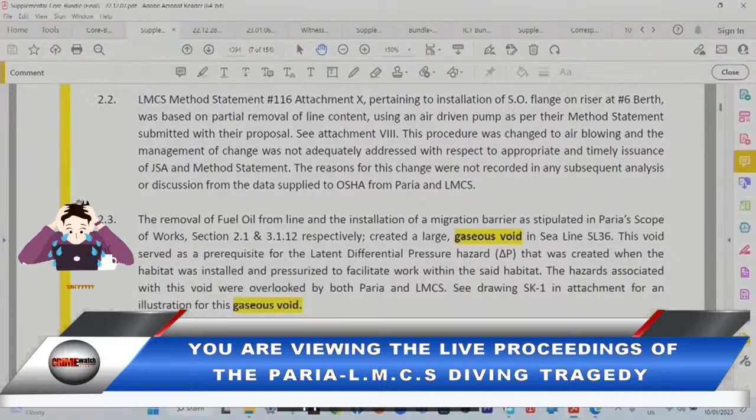The removal of fuel oil from line and the installation of a migration barrier, as stipulated in PARIA's Scope of Works, Section 2.1 and 3.1.12, respectively, created a large gaseous void in sea line SL36. This void served as a prerequisite for the latent differential pressure hazard that was created when the habitat was installed and pressurized to facilitate work within the said habitat. The hazards associated with this void were overlooked by both PARIA and LMCS. See drawing SK1 in attachment for an illustration for this gaseous void.

LMCS Job Safety Analysis, PARIA's Permit to Work number 9320, LMCS's Method Statement, Risk Assessment, LMCS's Toolbox Meeting, LMCS's Dive Plan, and PARIA's Bid Evaluation of LMCS's proposal all failed to identify this potential differential pressure delta P hazard, and hence no steps to eliminate the hazard were implemented. This latent hazard existed at the onset of work within the habitat and became active when the divers were attempting to remove the primary seal, which is the inflatable plug, from within the riser. See drawing SK1 in attachment and section 3.1 for further details.

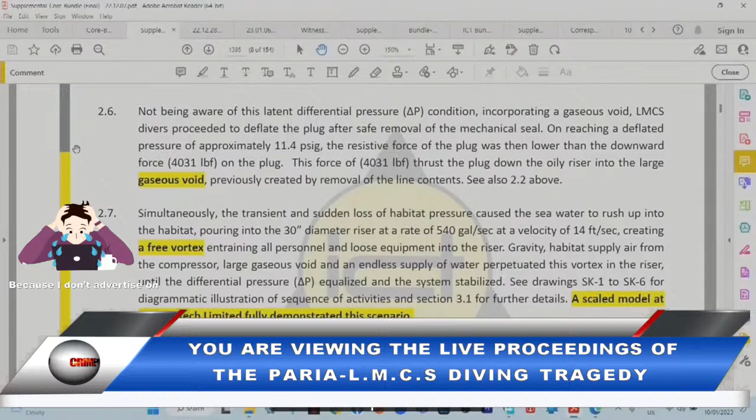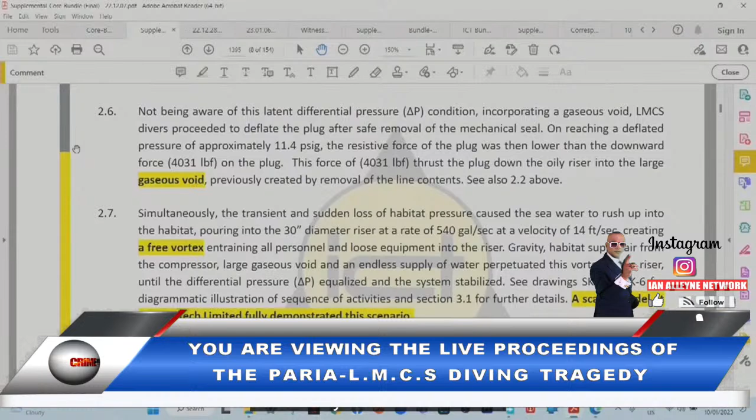Not being aware of this latent differential pressure condition incorporating a gaseous void, LMCS's divers proceeded to deflate the plug after safe removal of the mechanical seal. On reaching a deflated pressure of approximately 11.4 psig, the resistive force of the plug was then lower than the downward force, 4,031 pounds force on the plug. This force of 4,031 thrust the plug down the oily riser into the large gaseous void, previously created by removal of the line contents. See also 2.2 above.

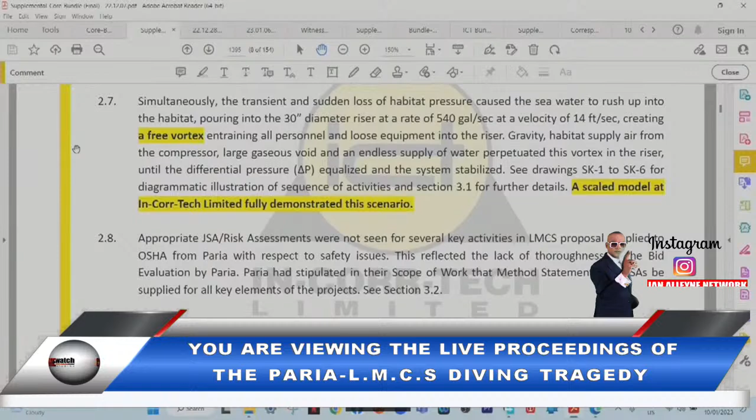Simultaneously, the transient and sudden loss of habitat pressure caused the seawater to rush up into the habitat, pouring into the 30-inch diameter riser at a rate of 540 gallons per second at a velocity of 14 feet per second, creating a free vortex, entraining all personnel and loose equipment into the riser. Gravity, habitat supply air from the compressor, large gaseous void, and an endless supply of water perpetuated this vortex in the riser. A diagrammatic illustration of sequence of events and section 3.1 for further details. A scale model at In-Corr-Tech Limited fully demonstrated this scenario.

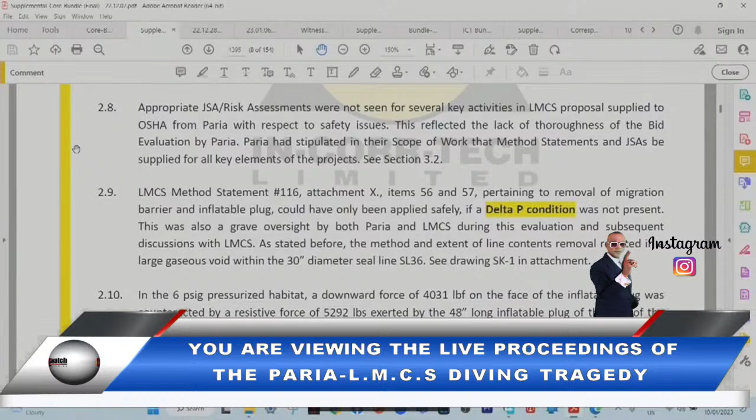Appropriate JSA risk assessments were not seen for several key activities in LMCS's proposal supplied to OSHA from PARIA with respect to safety issues. This reflected the lack of thoroughness of the bid evaluation by PARIA. PARIA had stipulated in their scope of work that method statements and JSAs be supplied for all key elements of the projects. See section 3.2.

LMCS's method statement 116, attachment X, items 56 and 57, pertaining to removal of migration barrier and inflatable plug, could only have been applied safely if a delta P condition was not present. This was also a grave oversight by both PARIA and LMCS during this evaluation, and subsequent discussions with LMCS. As stated before, the method and extent of line content removal resulted in a large gaseous void within the 30-inch diameter sea line SL36.

See drawing SK1 in attachment. In the 6 psig pressurized habitat, a downward force of 4,031 pounds force on the face of the inflatable plug was counteracted by a resistive force of 5,292 pounds exerted by the 48-inch long inflatable plug on the wall of the riser, based on a plug inflation pressure of 15 psig. This provided the necessary seal during all hot works within the habitat.

The sequence of events leading up to this accident are described verbally and illustrated via appropriate drawings, as shown in sketches SK1 to SK6 in the attachments. The operational safety concerns observed during inspection of the crane, for example load slippage under engine cut-off, non-functional load cell, etc., did not contribute to this accident.

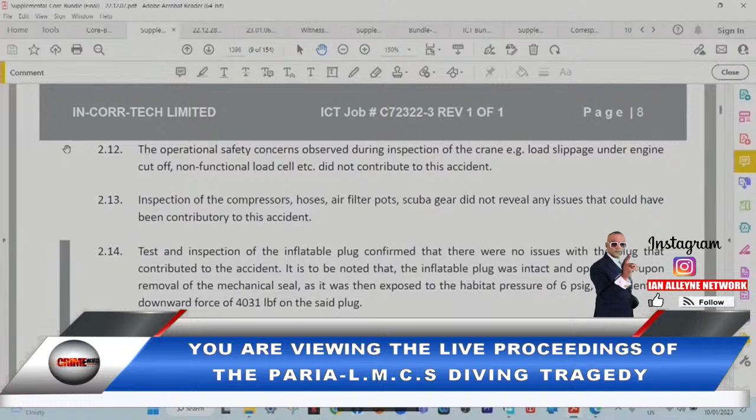Inspection of the compressors, hoses, air filter pots, scuba gear did not reveal any issues that could have been contributory to this accident. Test and inspection of the inflatable plug confirmed that there were no issues with the plug that contributed to the accident. It is to be noted that the inflatable plug was intact and operational upon removal of the mechanical seal, as it was then exposed to the habitat pressure of 6 psig, equivalent to a downward force of 4,031 pounds on the said plug.

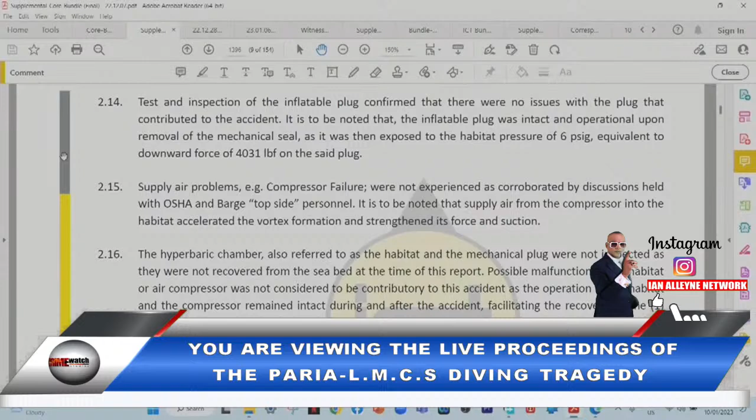Supply air problems, for example compressor failure, were not experienced as corroborated by discussions held with OSHA and barge topside personnel. It is to be noted that supply air from the compressor into the habitat accelerated the vortex formation and strengthened its force and suction. The hyperbaric chamber, also referred to as the habitat, and the mechanical plug were not inspected as they were not recovered from the seabed at the time of this report.

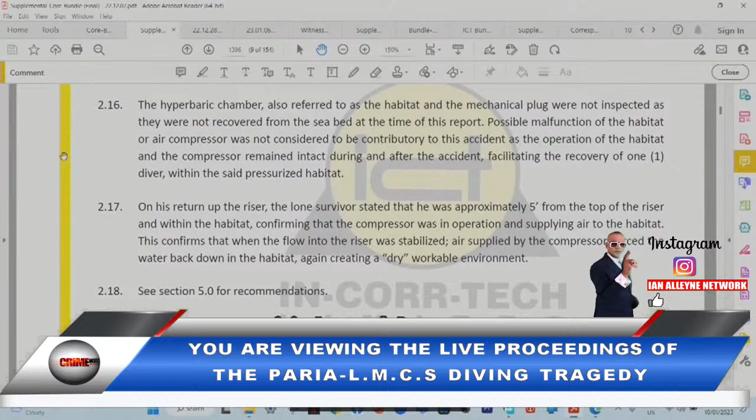Possible malfunction of the habitat or air compressor was not considered to be contributory to this accident, as the operation of the habitat and the compressor remained intact during and after the accident, facilitating the recovery of one diver within the said pressurized habitat.

On his return up the riser, the lone survivor stated that he was approximately 5 feet from the top of the riser and within the habitat, confirming that the compressor was in operation and supplying air to the habitat. This confirms that when the flow into the riser was stabilized, air supplied by the compressor forced the water back down in the habitat again, creating a dry, workable environment.

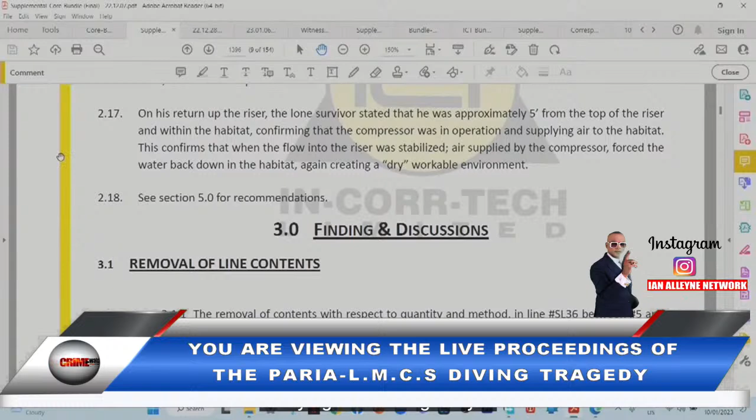I will now read out the findings and discussions. This is at 1396. Firstly, removal of line contents. The removal of contents with respect to quantity and method in line SL36 between number 5 and 6 berths was the underlying factor that led to this accident. This removal created a gaseous void in the riser and sea line, setting up a latent differential pressure condition between the habitat and a large gaseous void in the sea line when the mechanical seal and inflatable plug were installed and the habitat pressurized. See drawing SK1 in attachment.

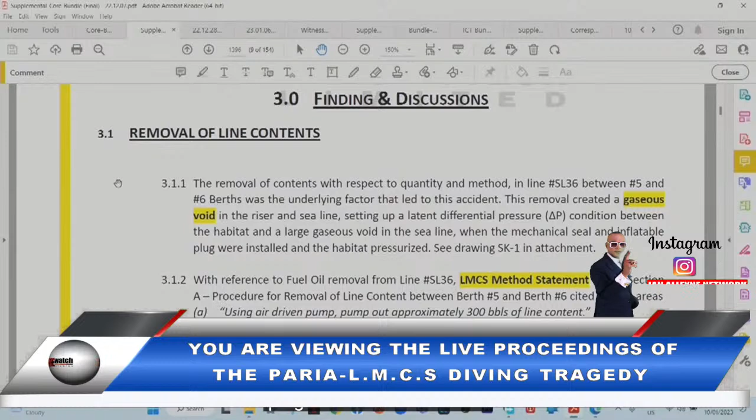With reference to fuel oil removal from sea line 36, LMCS's method statement under section A, procedure for removal of line content between berths 5 and berth 6, cited 2 areas. A, using air-driven pump, pump out approximately 300 barrels of line content. B, once level in the riser dropped to 35 feet below sea level, a line plug will be installed. Reference page 6 of 22 of LMCS's method statement.

A and B are contradictory, as removal of line contents to 35 feet below sea level in the riser would have been equivalent to approximately 30 barrels of oil removal with no gaseous void formation on installation of the mechanical seal and inflatable plug. On the other hand, as stated by LMCS, A, pumping out 300 barrels with an air pump does not equate to dropping level in the riser to 35 feet below sea level. This discrepancy was not addressed in PARIA's bid evaluation.

Further, LMCS's project schedule calls for draining of line from day one of job execution, further adding conjecture to this exercise. PARIA's maintenance department, as recorded by OSHA, stated that line contents were indeed removed by air blowing from number 5 berth to number 6 berth.

This latent hazardous condition existed very early in the job execution, but was activated on the 25th of February 2022 when 5 divers were in the process of deflating the riser plug for its removal. See drawing SK3 in attachment for a pictorial illustration. See drawing SK1 and SK4 in attachment. And he concludes, changing the method of oil removal from the line from using an air-driven pump, as per LMCS's method statement, to forced air blowing from berth 5 resulted in a dramatic increase in the risk profile of the job.

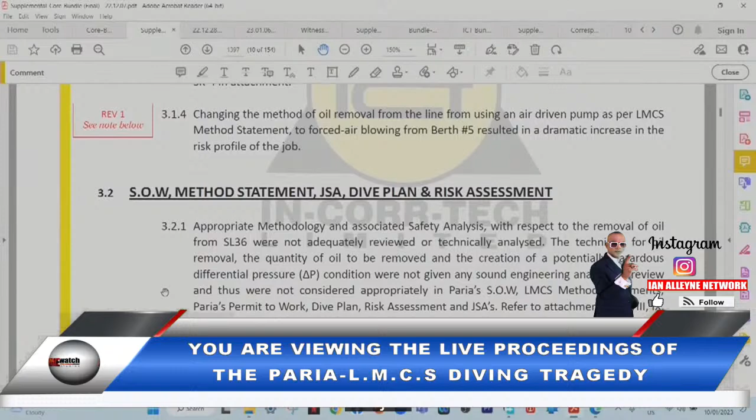I turn to the recommendations as made at page 1403 at 5.0. At 5.1, working in differential pressure environments necessitates an engineering risk analysis by a competent person. Differential pressure can be assumed to exist when: 1. Water levels vary between adjoining areas. 2. Water is next to a gaseous void. 3. HP air is next to low pressure air. 4. Positive pressure, that is, above atmospheric, is next to atmospheric pressure, 0 psig.

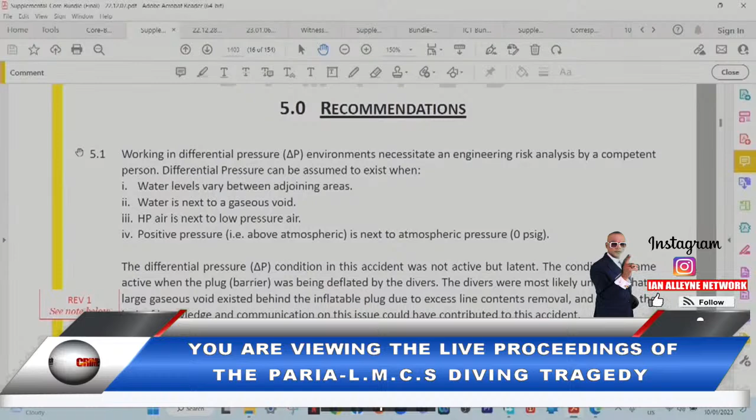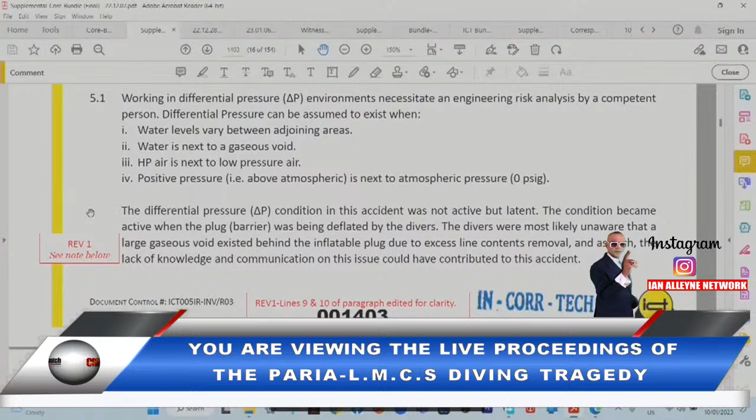The differential pressure condition in this accident was not active but latent. The condition became active when the plug or the barrier was being deflated by the divers. The divers were most likely unaware that a large gaseous void existed behind the inflatable plug due to excess line contents removal, and as such, the lack of knowledge and communication on this issue could have contributed to this accident.

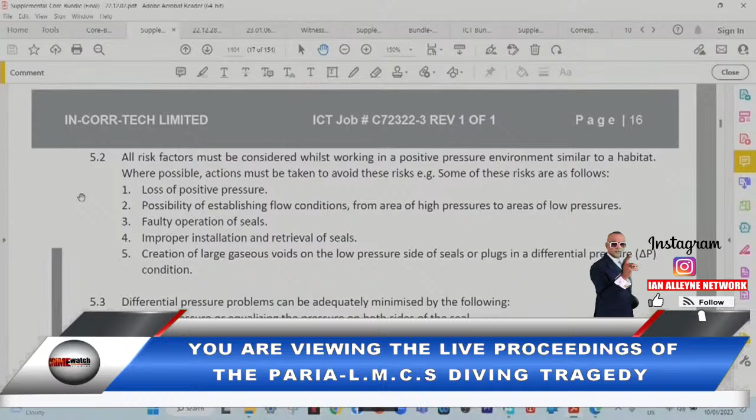5.2. All risk factors must be considered whilst working in a positive pressure environment similar to a habitat. Where possible, actions must be taken to avoid these risks. Example, some of these risks are as follows. 1. Loss of positive pressure. 2. Possibility of establishing flow conditions from areas of high pressure to areas of low pressure. 3. Faulty operation of seals. 4. Improper installation and retrieval of seals. 5. Creation of large gaseous voids on the low pressure side of seals or plugs in a differential pressure condition.

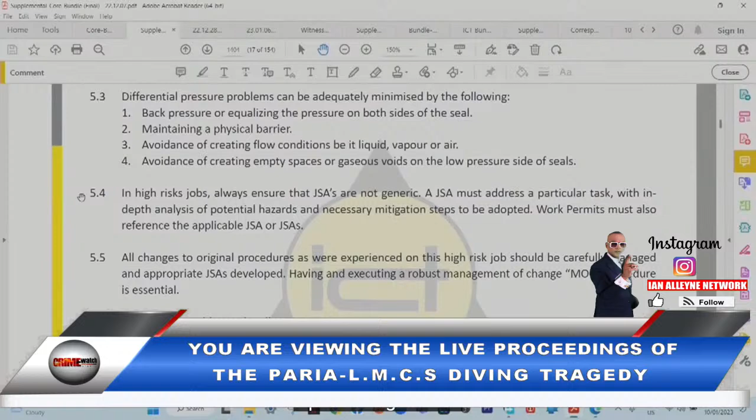5.3. Differential pressure problems can be adequately minimized by the following. 1. Back pressure or equalizing the pressure on both sides of the seal. 2. Maintaining a physical barrier. 3. Avoidance of creating flow conditions, be it liquid, vapor, or air. 4. Avoidance of creating empty spaces or gaseous voids on the low pressure side of seals.

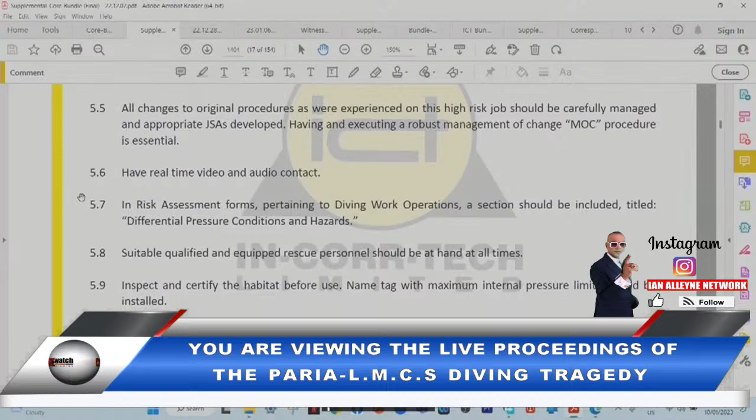5.4. In high-risk jobs, always ensure that JSAs are not generic. A JSA must address a particular task with in-depth analysis of potential hazards and necessary mitigation steps to be adopted. Work permits must also reference the applicable JSA or JSAs. 5.5. All changes to original procedures, as were experienced on this high-risk job, should be carefully managed and appropriate JSAs developed. Having executed a robust management of change, MOC procedure is essential. 5.6. Have real-time video and audio contact.

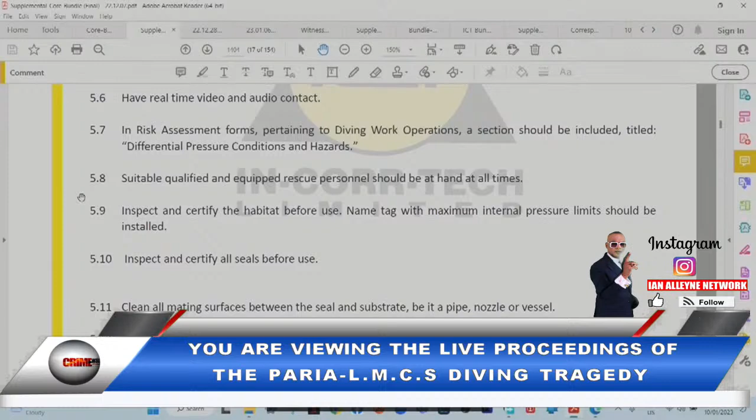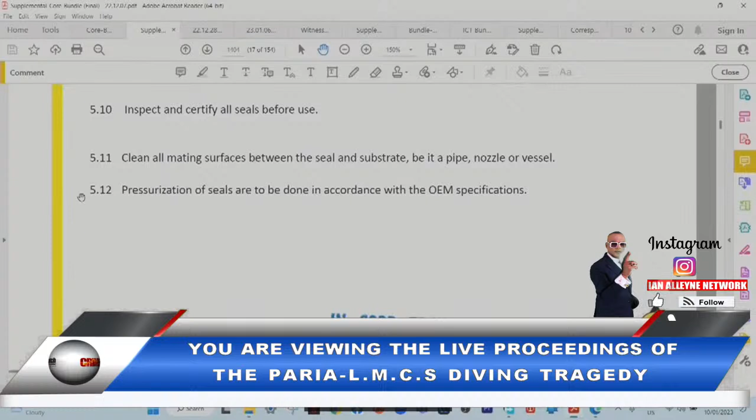5.7. In risk assessment forms pertaining to diving work operations, a section should be included titled Differential Pressure Conditions and Hazards. 5.8. Suitably qualified and equipped rescue personnel should be at hand at all times. 5.9. Inspect and certify the habitat before use. Name tag with maximum internal pressure limits should be installed. 5.10. Inspect and certify all seals before use. 5.11. Cleaning all mating surfaces between the seal and substrate, be it a pipe, nozzle, or vessel. 5.12. Pressurization of seals is to be done in accordance with the OEM specifications.

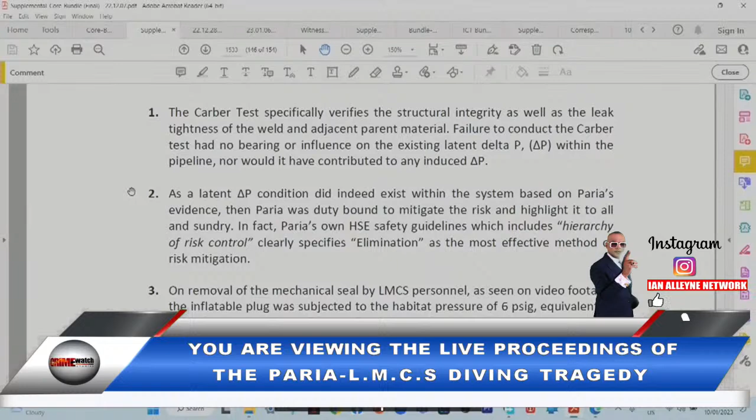I turn to the 3 letters that were written after the report. The first is at the 6th of December 2022, which is at Supplemental Core Bundle 1533. It's a letter dated 6 December 2022 from the expert to the Secretary. Dear Ms. Sinanan, in response to your request dated 30th November 2022 for further advice, I wish to advise as follows on the 5 matters. 1. The carber test specifically verifies the structural integrity as well as the leak tightness of the weld and adjacent parent material. Failure to conduct the carber test had no bearing or influence on the existent latent delta P within the pipeline, nor would it have contributed to any induced delta P.

2. As a latent delta P condition did indeed exist within the system based on PARIA's evidence, then PARIA was duty-bound to mitigate the risk and highlight it to all and sundry. In fact, PARIA's own HSE safety guidelines, which include, and he quotes, hierarchy of risk control, clearly specify elimination as the most effective method of risk mitigation. 3. On removal of the mechanical seal by LMCS's personnel, as seen on video footage, the inflatable plug was subjected to the habitat pressure of 6 psig, equivalent to a downward axial force of 4,031 pounds, and it held its seal for an extended period.

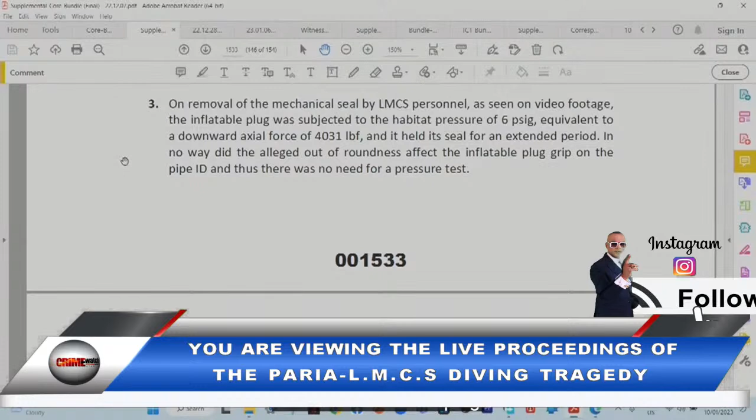In no way did the alleged out-of-roundness affect the inflatable plug grip on the pipe ID, and thus there was no need for a pressure test. As stated in In-Corr-Tech Limited's report, and he specifies, on reaching a deflated pressure of approximately 11.4 psig, the resistive force of the plug was lower than the downward force, 4,031 pounds, on the plug. Thrust the plug down the oily riser into the large gaseous void.

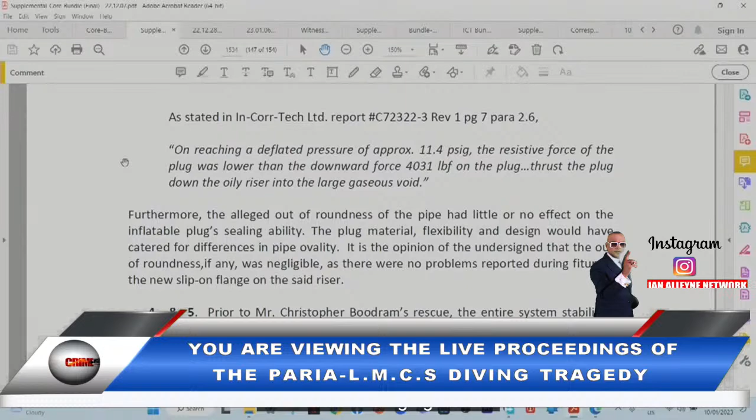Furthermore, the alleged out-of-roundness of the pipe had little or no effect on the inflatable plug's sealing ability. The plug material, flexibility, and design would have catered for differences in pipe ovality. It is the opinion of the undersigned that the out-of-roundness, if any, was negligible, as there were no problems reported during fit-up of the new slip-on flange on the said riser. And then 4 and 5.

Prior to Mr. Christopher Boodram's rescue, the entire system stabilized and equalized itself at both ends of SL36, and thus allowed Mr. Boodram to negotiate the pipe without any disruptions, as the system was static. This condition was the best opportunity to attempt a rescue, as removing the blank at berth 5 or shutting down the compressor would have released the stored potential energy from the compressed air and thus disturb the equilibrium and thereby imperil any divers in air pockets.

Mr. Khan then says, if you require further information or clarification, please do not hesitate to contact the undersigned. And he concludes, sourcing the entire video footage obtained from the crawler borescope from berth 5, conducted around 5 a.m. on Saturday, 26 February, may be worthwhile for this investigation.

Mr. Chairman, there was a further letter dated 28th December 2022, which is at page 1536A, and I will just read the contents, again addressed to Ms. Sinanan. Dear Ms. Sinanan, in light of the several references made by various legal counsel to the above report, I wish to bring to the attention of the Commission the following pointers. These, in my opinion, will negate the possibilities of misinformed deductions, skewed inferences, and unnecessary conjecture in further deliberations.

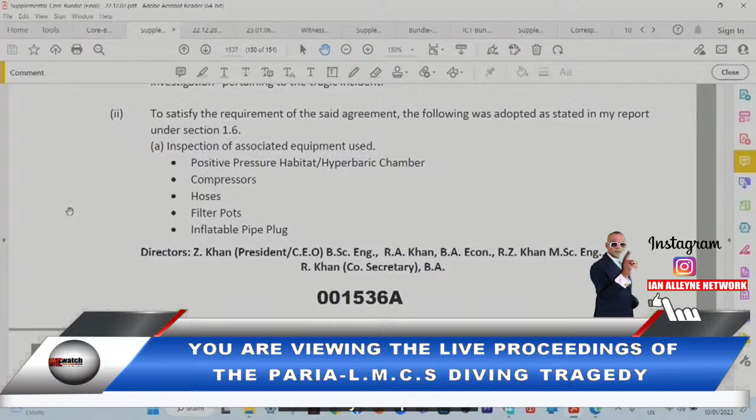1. An agreement dated March 2022 was signed between In-Corr-Tech Limited and OSHA to conduct a root cause analysis and causative factor investigation pertaining to the tragic incident. 2. To satisfy the requirements of the said agreement, the following was adopted as stated in my report under Section 1.6. A. Inspection of associated equipment used: firstly, positive pressure habitat hyperbaric chamber; secondly, compressors; thirdly, hoses; fourth, filter pots; fifth, inflatable pipe plug; 6, mechanical seal; 7, scuba equipment; 8, crane used in the exercise, being a model LS218H.

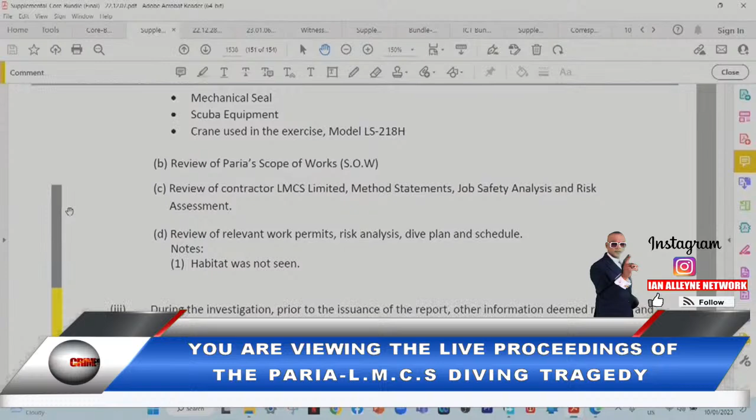B, review of PARIA's scope of works. C, review of contractor LMCS's method statements, job safety analysis and risk assessment. D, review of relevant work permits, risk analysis, dive plan and schedule notes. And he notes that the habitat was not seen.

In his further opinion, he says, 3, during the investigation, prior to the issuance of the report, other information deemed relevant and necessary, for example, details surrounding the actual line content removal and methodology, were not received. 4, owing to the delays experienced, the scheduled time for the submission of the report was not met. 5, the report was issued to OSHA on 19th July 2022, several weeks late, with the caveat, this report is based on the information and available documents supplied by OSHA, as stated under paragraph 1.7, page 6 of my report.

And then at 6, based on reviews of additional pertinent information seen after the issuance of my report, I wish to state that my basic conclusions and recommendations remain. 7, based on pertinent information supplied to me on 27th July 2022 by OSHA, which I requested on 6 May 2022, there may be need to revise some sketches in my report to reflect a more realistic picture.

And then it says, in summary, 1, agreement between OSHA and In-Corr-Tech Limited was signed on 29th March 2022. 2, report issued to OSHA on 19th July 2022. 3, pertinent additional information requested by myself during discussions with OSHA was supplied on 27th July 2022, 7 days after issuance of the report. And it says any further clarification can be accommodated through contact with the undersigned.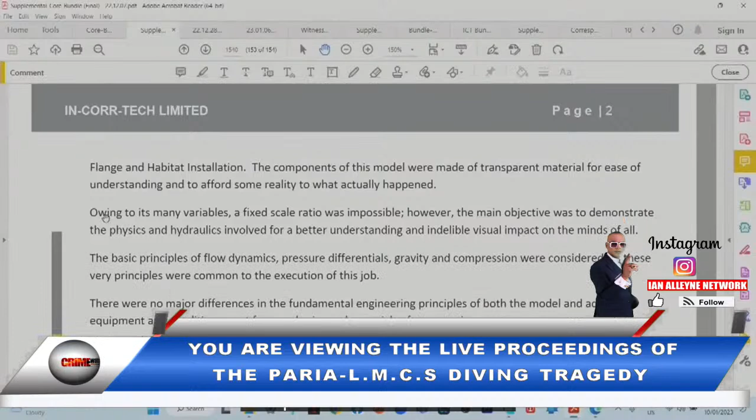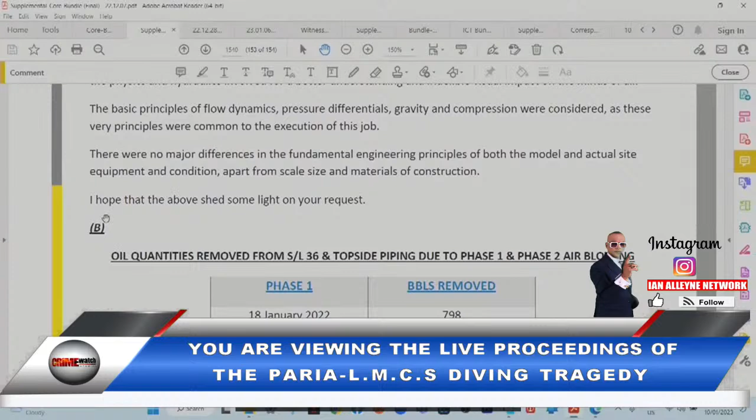The components of this model were made of transparent material for ease of understanding and to afford some reality to what actually happened. Owing to its many variables, a fixed scale ratio was impossible. However, the main objective was to demonstrate the physics and hydraulics involved for a better understanding and indelible visual impact on the minds of all. The basic principles of flow dynamics, pressure differentials, gravity, and compression were considered, as these very principles were common to the execution of this job.

There were no major differences in the fundamental engineering principles of both the model and actual site equipment and condition, apart from scale size and materials of construction. I hope that the above sheds some light on your request. He then prepared a table, and I will just narrate as best as I can what the table demonstrates.

The heading is oil quantities removed from Sea Line 36 and topside piping due to Phase 1 and Phase 2 air blowing. Phase 1, 18th January 2022, 798 barrels removed. On 20th January 2022, unknown quantity of barrels removed. On 21st January 2022, 118 barrels removed. Total phase 1, at least 916 barrels. And then on 1st February 2022, there was a setup for phase 2.

And phase 2, which was subsea, on 2nd February 2022, 276 barrels were removed. On 3rd February 2022, 60 barrels were removed, which were in a barge. He said not 100. On 4th February 2022, an unknown quantity of barrels were removed, so that the total for phase 2 was at least 336 barrels. He says the total of phase 1 and phase 2 is at least 1,252 barrels. The author makes 2 notes.

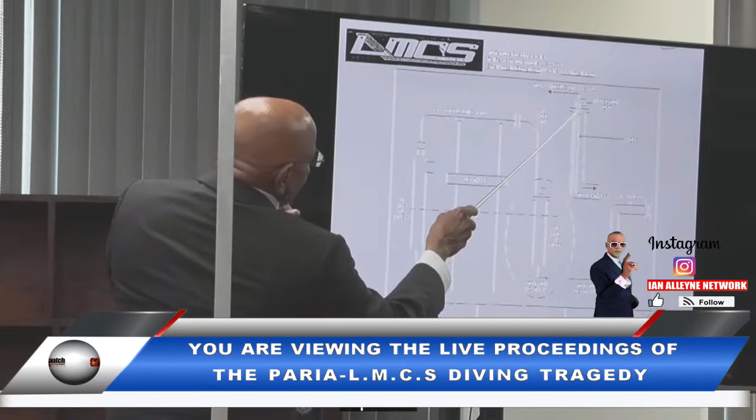Right, could you explain? Yeah. Okay. This is the setup. This represents 36 sea line, number 6 berth. You see the flange up here? That is a blind flange. And the blind flange had a dip tube going on inside here, like this. See here? This represents the blind flange. The dip tube is going down right to the bottom of the elbow. This is closed, and that is an inspection port where they would have used to measure the ullage.

So, as I said before, at the end of phase 1, there was a pressure at number 5 berth locked in, and that supported a column of liquid inside here. And whoever took a dip here would have said, hey, we still have material to move out, not realizing that that section of the line is almost empty. But the pressure inside here would have supported the column of liquid in here. So to get that out now, he had to put this dip tube and drain out into the slops barge. And that is what I think I saw in the method statement.

Yes, and for the records, that document is attached to LMCS method statement for phase 2 line clearing at page 1043 of volume 3 of the core bundle. Well, can I ask you now to play the video and stop at 31 seconds?

And an expanded view of the modified blind flange at berth 6 to accommodate the dip hose and inspection port can be seen. A modified blind flange was used to accommodate.

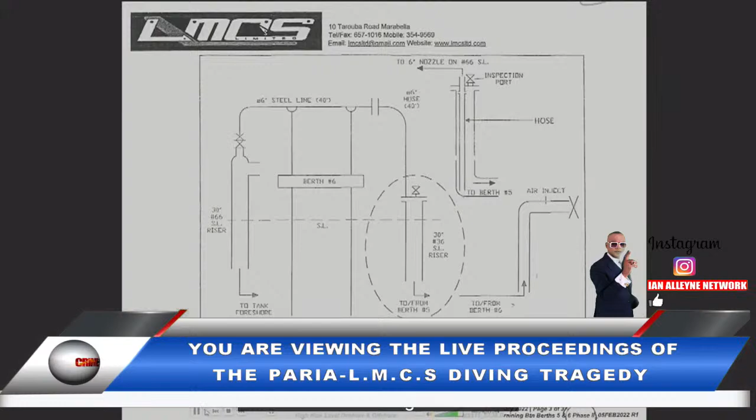Flange at berth 6 to accommodate the dip hose and inspection port can be seen. A modified blind flange was used to accommodate the 6-inch dip hose at berth 6. Right.

What we are seeing here, could you explain it? All right. At that particular point, as I said, the gooseneck on the top side of berth 6 was removed. And this is the flange that I was speaking of in the initial picture. This is the sea level here. So this flange was above sea level at the time. Remember, they have to do repairs below here. So they have to cut this line below this level here. And to get at that, they had to put the habitat on. But anyway, we'll come to that after.

So you will see where the dip tube, I simulated the dip tube through a flange here, and I held down this thing with some paper clips, some bulldog clips. This was a dip tube going down to touch the remnant liquid in the pipe. And when this system was pressurized, through the system, it forced the remnant liquid through here and come to here, and you will see that demonstrated.

Right, so if I understand it, this is a modified flange with the dip hose at berth 6. And could you point out to us the elbow at berth 6, which has now been removed? Well, we don't have it here. Oh, you don't have it here? That's the one I showed you in the original picture. Okay. That's the 30-inch elbow. And the dip hose has been inserted? Yeah, when you take off the elbow, you expose this flange.

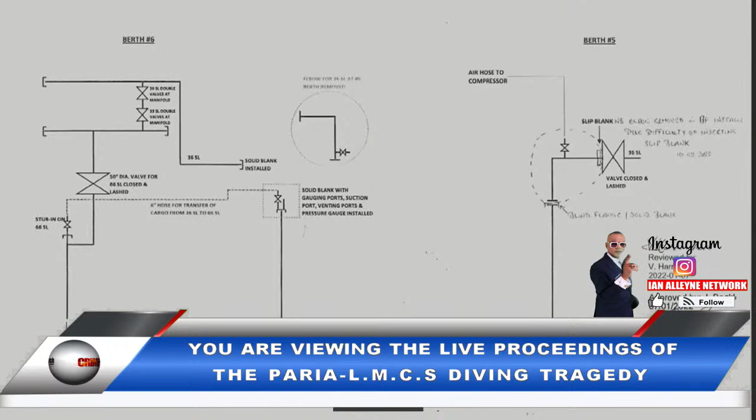As phase 1 air blowing was not capable of displacing all the product in the line, phase 2 air blowing using a 6-inch diameter dip hose at berth 6 was done. Drawings showing the line diagram with dip hose at berth 6 and an expanded view of the modified blind flange at berth 6 to accommodate the dip hose and inspection port can be seen.

A modified blind flange was used to accommodate a 6-inch dip hose at berth 6. A blue plastic hose is shown in the model to represent the hose inserted into the berth 6 riser to the bottom of the elbow to facilitate removal of the remaining fuel oil. The sealed 30-inch sea line, being blind flanged at berth 6 and at berth 5, was pressurized at berth 5. The pressure within the 30-inch diameter subsea line then forced the remnant fuel into the 6-inch dip hose to storage

as seen. This continued until air with little fuel oil was seen emanating at the collection area, at which time the dip hose was removed. The air supply at berth 5 was subsequently closed and the system stabilized. The remnant fuel oil was pushed up to a certain height in berth 6, balanced by the locked-in back pressure at berth 5, giving a false impression of the subsea line being filled with oil still, and not realizing that the line was practically empty with a large gaseous void.